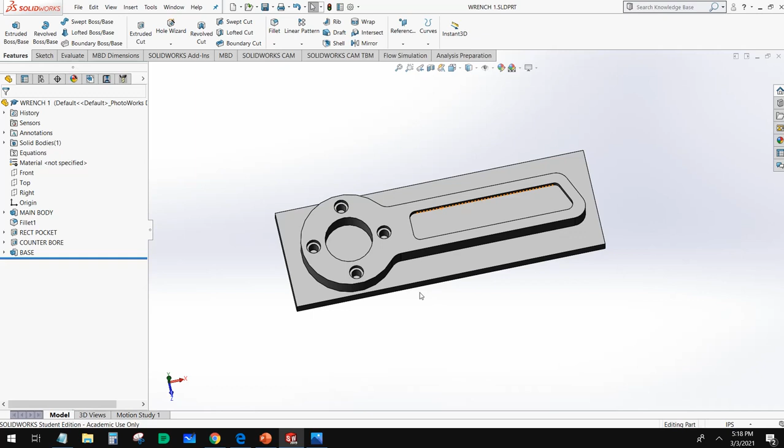This is just a representation of a part. It's a pretty good analogous part for other parts that you may want to mill, like race car parts or aircraft parts. So we're going to cover how to write the toolpath for this, and then we're going to be left with this pedestal here that we're going to have to remove.

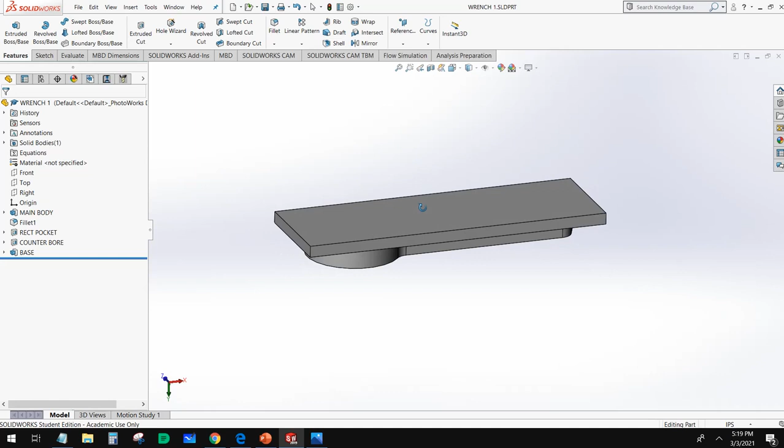Now, the way we would do this would be to flip this part over and chuck it in the mill, and then go ahead and face this off. Now, the issue we're going to run into is we can't really chuck this effectively in the mill.

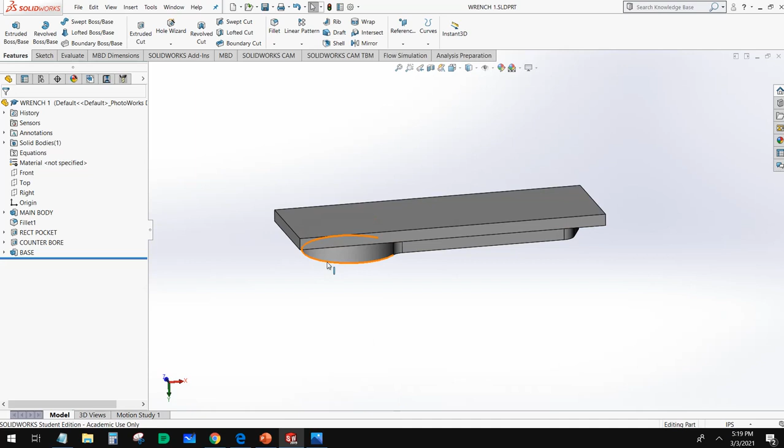So what we're going to do is create a set of soft jaws. Now, in the lab, we've already gone through the beginning part of this. But what we have to do for the soft jaws is machine in a pocket to accept this, that way we're not crimping or deforming this shape at all. So we're going to go over how we generate that pocket, how we write the programming, and how we're going to execute that in the mills.

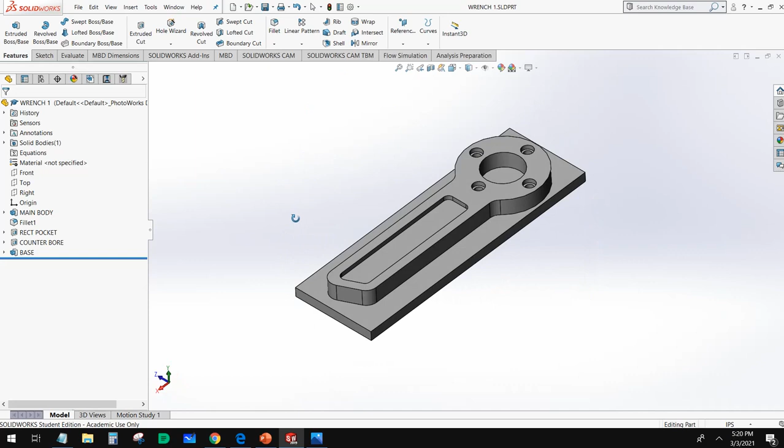But for right now, let's go ahead and set up the tool table for this. So I'm going to give you guys this part. You can check on Brightspace for this.

We're going to go ahead and start this like we normally do. We're going to go to SolidWorks CAM and define the machine. Now we're going to come to this screen here. We're going to choose mill inches, and then we're going to go to tool crib.

And if you see down here, we should see several tool cribs - tool crib 1, 2, 3. What we're going to do is just choose one. Select that. And if you have tools in here, just use the remove tool function to go ahead and remove those. We want a blank tool table. I've got a blank one here, so I'm going to go ahead and do this.

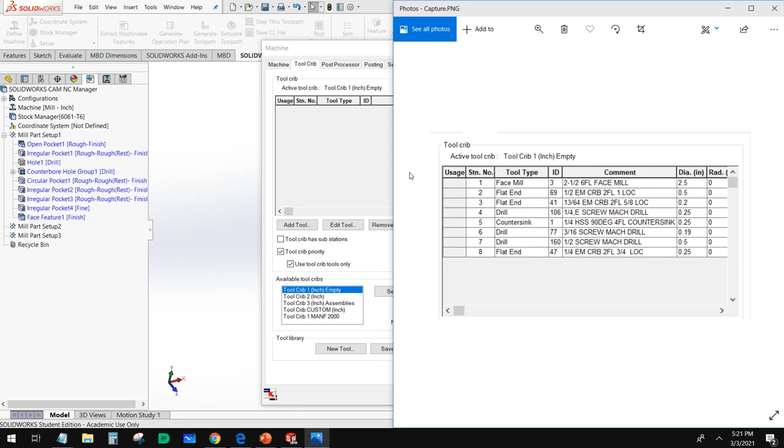Now the tools that we're going to be loading - this is from our tool index that we have in the mill. So we've got our face mill, our flat end mills, our drill, countersinking tool, some more drills, and another flat end mill. We're going to go ahead and add these in one at a time. So what we're going to do is add this 2.5 inch face mill first. We're going to go to add tool.

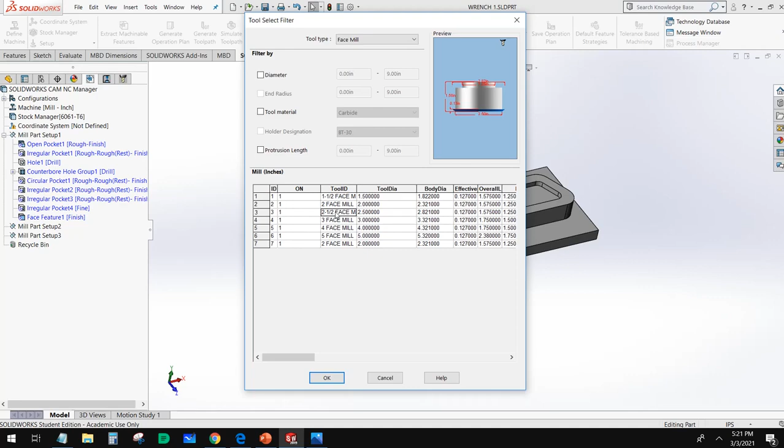This is going to pop up with our tool selector. What we want to do is select tool type to face mill. We have a few different options here. We're going to choose the one called 2.5 inch face mill and OK.

And that'll pop up here, face mill, 2.5 inches. We're going to repeat this for our full range of tools here. We're next going to load in our 1/2 inch 2 flute end mill. We're going to go to Add Tool.

We're going to choose End Mill, Flat End. This is going to list all of them, right? Right, and pretty much every common size. If you're looking for a specific size, you can filter by diameter and set that to 1/2 inch. And then it will pop up with everything from 1/2 inch on up.

Now pay attention to the number of flutes. These are all carbide tools. Like I said in previous videos, that's not going to matter, but we do want to pay attention to the flutes, and we're going to choose the 2 flute option. We've got our second one in there.

Next is our 13/64 2 flute end mill. This should be 3/16. So we're going to go ahead and make sure that this is 3/16. Let's see. Add tool.

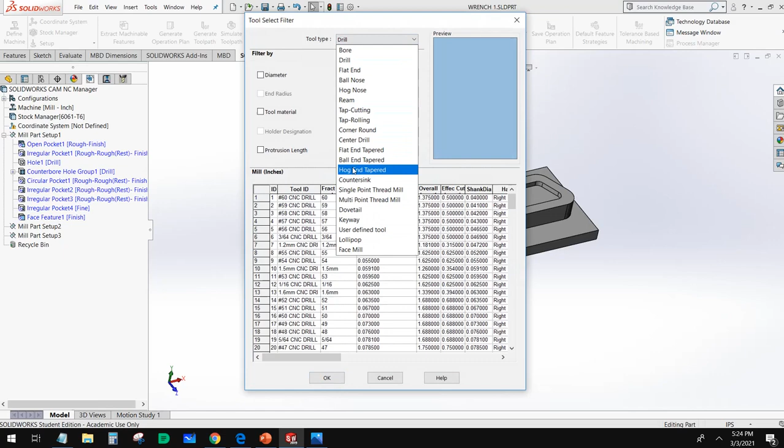So we're going to go to 0.25. Quarter inch CNC drill. Our countersink tool, this is that 90-degree countersink, that's also a 1/4 inch. Our 3/16 and 1/2 inch drills.

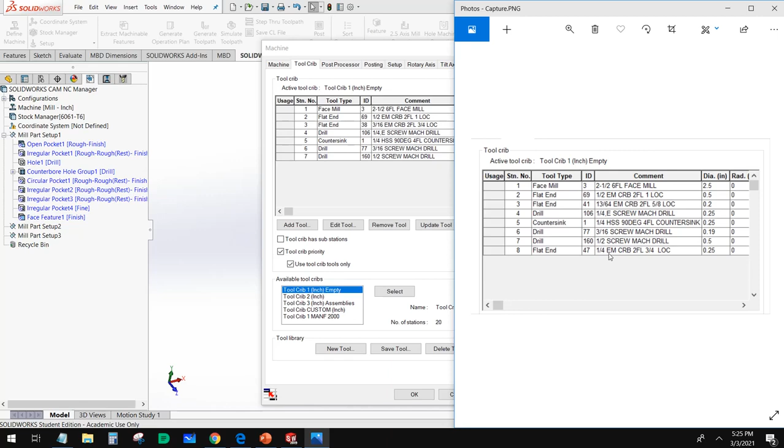And our last tool, which is going to be that 1/4 inch end mill. Make sure you select the 2 flute option.

All right, and here we have our complete tool table. So this mimics exactly what we have in the lab. So this way we know that when we go ahead and generate our tool paths, we have an accompanying tool for that.

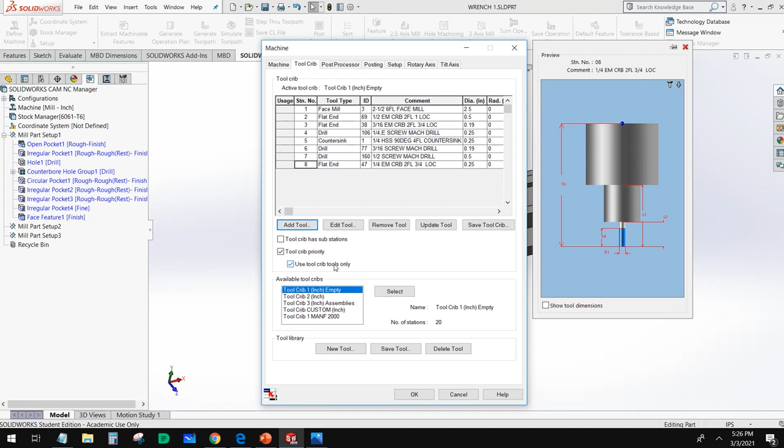Now this is important. Make sure you select Use Tool Crib Tools Only. If you don't have this selected, when you go ahead and generate tool paths, it will use the best tool for the job, or what it thinks is the best tool for the job. If you select Use Tool Crib Tools Only, it's going to generate the tool paths using only what we have available. So we want to make sure we have that selected.

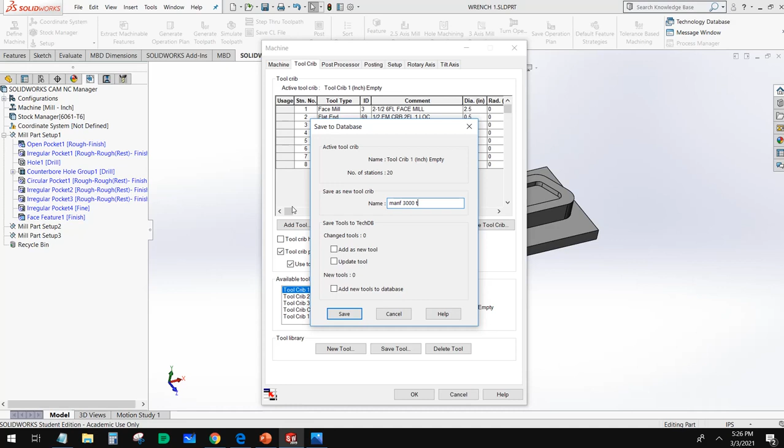We're then going to go ahead and save Tool Crib. And we can save this as whatever we feel like saving. Manufacturing 3000 tool crib. And we can go ahead and save that. Now that's going to go ahead and save into our available tool crib.

So next time when we go ahead and define machine, we're going to go to tool crib. We're going to select the tool crib that we want and select, and then we can go ahead and click OK.